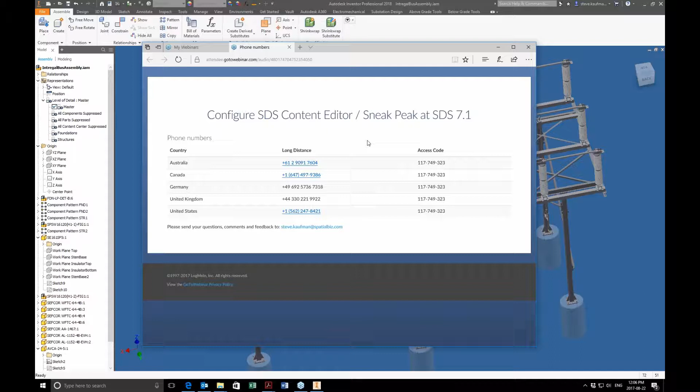So what we're first going to look at is some of the new items in 7.1. There's quite a number of things, a number of bugs and fixes, but also some new tools, and we're going to go through that first. So we're going to do the sneak peek at 7.1 first.

So let's minimize this, and we'll come into the sneak peek. What I want to show you first of all is just a couple exciting tools. I think they're exciting, mainly because I kind of pushed for them, but I like these tools, and we're going to look at this guy here. This is 7.1 I'm running, in 2018. The 7.1 will be available in 2015, 16, and 17 as well, so it's all going to work on different versions of Inventor.

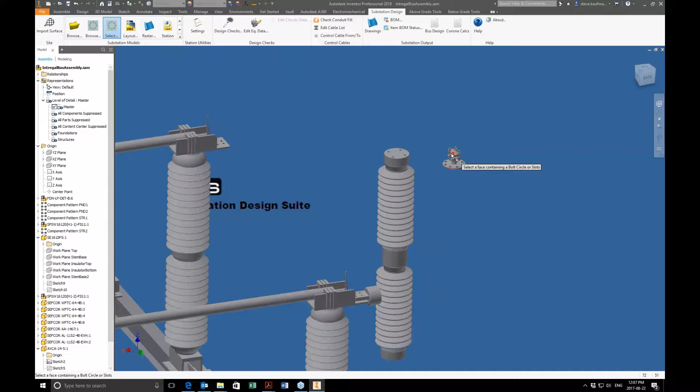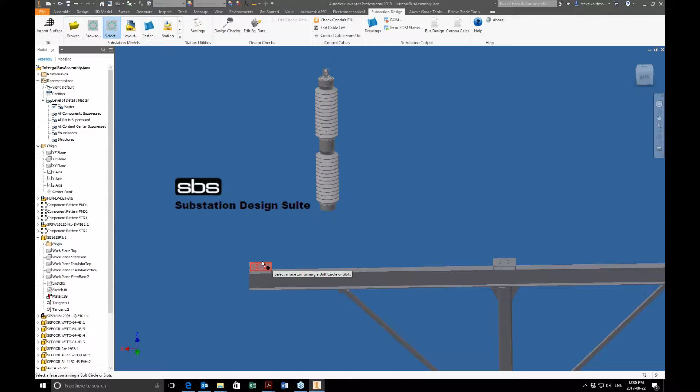In this tool here, I have a new tool called Select and Assemble Model Containing Bolt Circle Features. So if I highlight this button and highlight my piece, and highlight my piece I want to go to, it mates that for me. And now it has a mate on here. So what I'm doing is mating that bus component to the insulator. Now I don't have to just stop there, I can also connect from my insulator to my work piece here. And now I have them all attached.

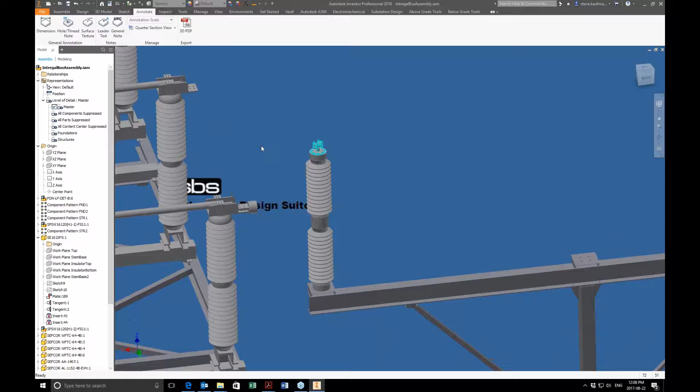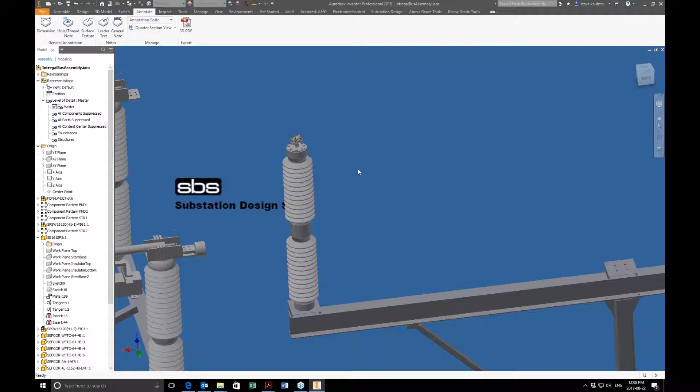Now if the holes don't line up, it will only show one attachment point. So we're still working out on this, and I was surprised by what we just saw there. So it is attached here solidly, and we're working on that as well. I'm going through a lot of the bugs and fixes and looking at the new tools as well, and feeding back. So I really think the 7.1 will be released in September, early September, and we're really working hard to get it out. But I really like some of these tools, especially this tool of bringing a part in.

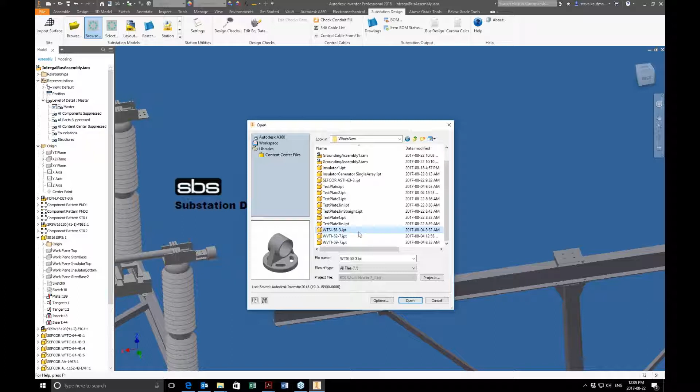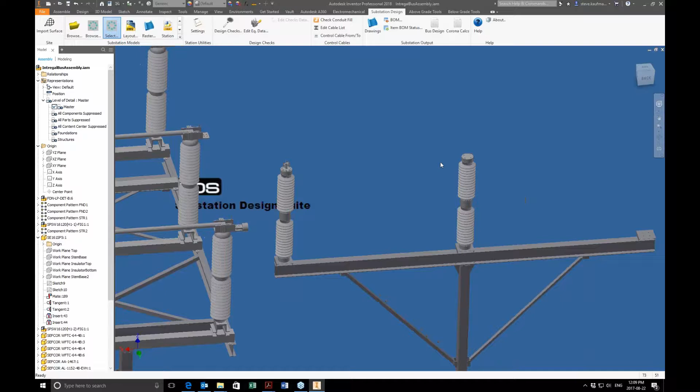The other part of the tool also brings in, I can browse to a fitting. If I come into a fitting here... where is that fitting? Oh, I know, I'll do this. Let's copy this guy. Copy, paste, and then I can go grab him as well. So we can browse to a fitting and also mate to a fitting. So that's one new tool that we've added.

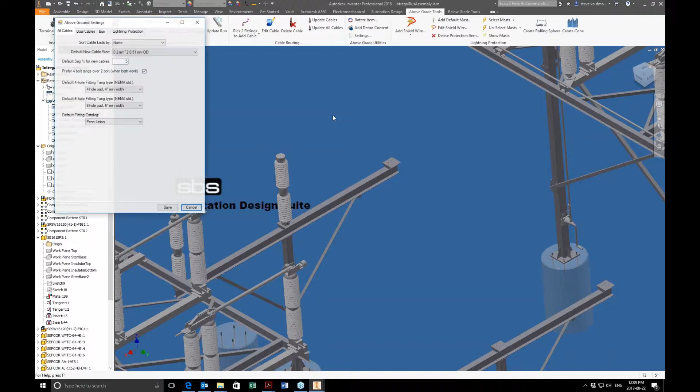Another tool that we've added that has been asked for is the integral web bus tools. So I'm going to place one of these now. I'm going to come to my above grade tools, come up to my settings. One thing new in the settings as well is that when I come into the bus, we have the integral web bus. So we have a library of those, and of course that can be customized, and we'll talk about that customization later today. But in the meantime, I'm going to place this 4x4 bus.

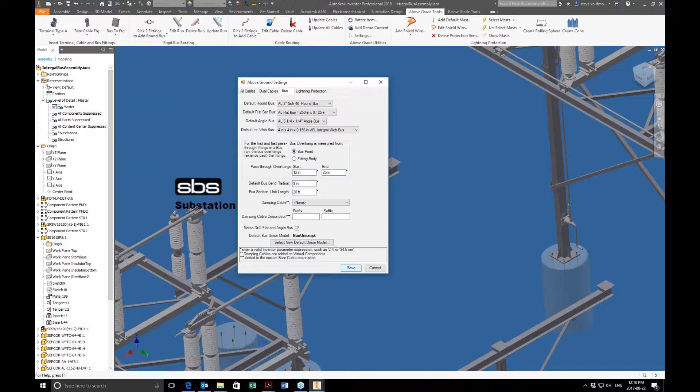As you can see, pass-through overhangs, start and end have been added in here too, so I can actually add in a number here for each of these, and it can be different numbers. I'm going to save that. Now I'm going to place in that integral web, and you can see we have a new item on the bottom of our pull-down menu. I can pick my two surfaces, and with that, that web is added.

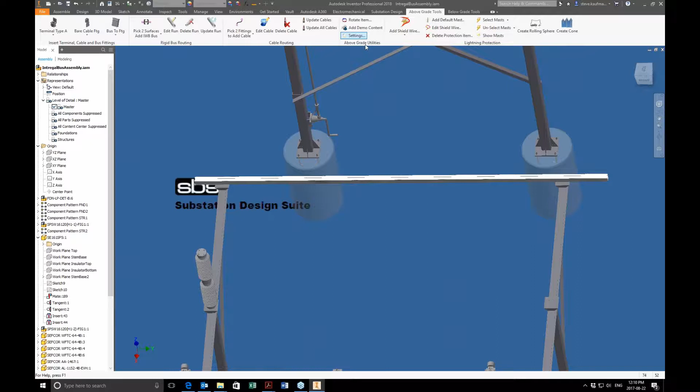So what it is, you can see with my settings as being longer on one side than the other and a 12-inch overhang. But also it has this new bus web design. It's a little bit beefier and stronger, and it can do longer spans than a round bus. So we can put that bus in there.

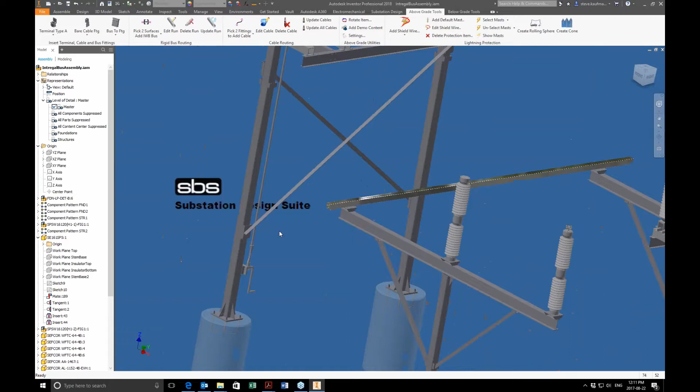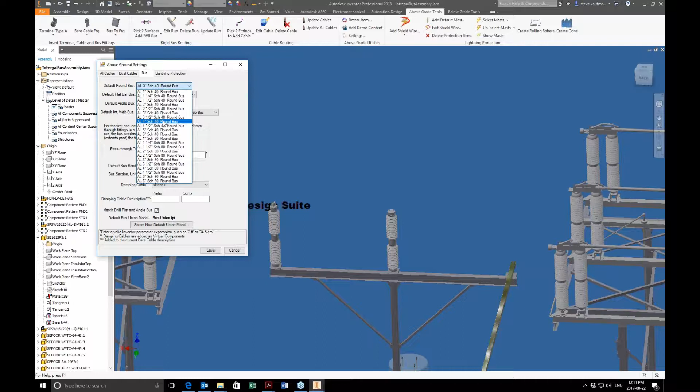Also, we can do that same tool, of course, if we are setting it up. Let's say we come back up to our settings, and we always want to see a negative number. So let's put a negative 5 inches in here, and we'll save it. I'm going to check my settings again. Bus. Let's go 3.5-inch bus. Save.

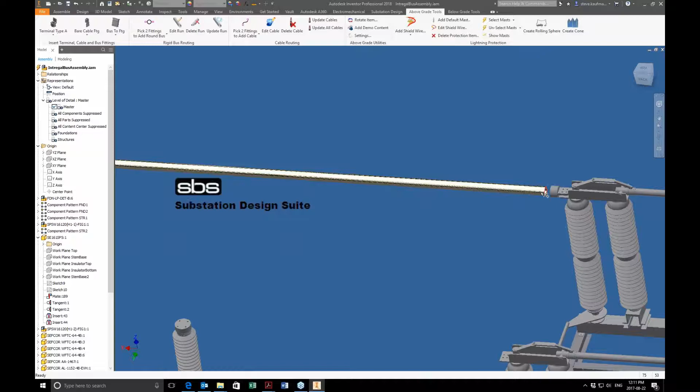So the next step, I want to go back into the placing of the bolted assemblies. Let's see what else the bolted assemblies will do. So we have our pieces here, and I have a group of pieces, and what we can do is add different bolted assemblies.

So I'm going to grab this guy here, and place him. We have this tool, we can place this, and I'm going to pick this guy here. You can see how it's added on. Now let's look at what the constraints are.

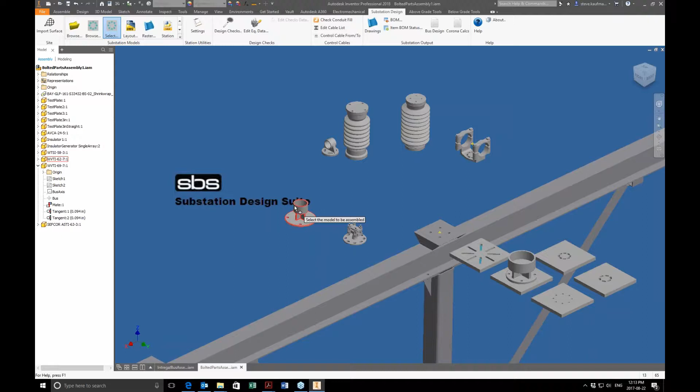The constraints is a mate face-to-face, and it's a tangent constraint. We can also place, I believe this guy works well with this one, on the slotted type of arrays here. So we can place different types of things on different items. If we place the wrong one, and I showed that a little bit earlier, if I place this one on this one, which is too small, it's not going to place it correctly. So we're working out whether we want to use a warning window to say, hey, that's the wrong size.

Usually it's pretty obvious that it doesn't fit, but when it does fit, it fits quite fine. So this is a 3-inch bolt circle. This is a different bolt circle. So we can go on like that.

So that is the type of fittings we can add. If I were to add this guy, let's copy that guy and paste him over here. Now I can place this guy to this surface here, and it's the wrong size. If I place this guy to the surface, it is the right size. So this size is fitting that size. This one is obviously not fitting.

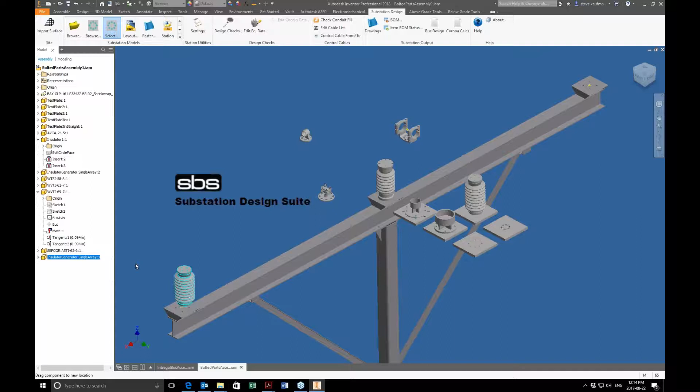So I think what we need is a window to pop up, but if you guys give me feedback, if this is obvious enough, that it is obvious that that doesn't fit, we can go from there. So those are the two key points that I really like in the new 7.1.

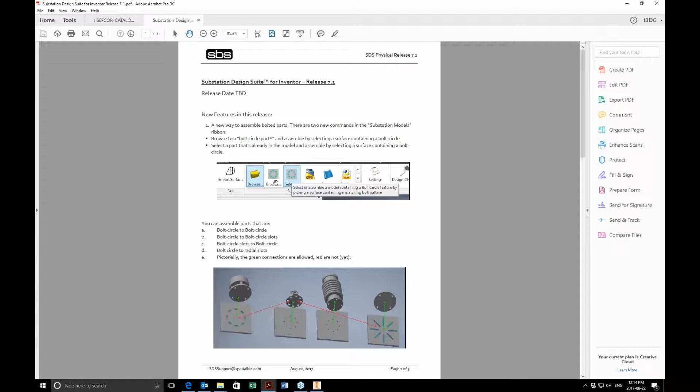There's a number of things that we're doing, but let's continue with these fittings. In the attachment, this is the attachment I have placed in the handouts in the GoToMeeting here. So here we are, we're talking about the handout in the GoToMeeting, and I'm going to look at what we're doing down here. This is where we're at with placing these fittings, insulators and fittings. We're able to put on a slotted fitting, we're able to put on hole fittings or long slot radial fittings. We're able to put this together.

We are able to put slot to a circle. We haven't yet got slot to a slot yet. We're still working on that issue, but for the most part, this is the most common one, is a group of holes like this. This is what I see. I don't see too many radials. I see a lot of slots to holes. I don't see too many slots to slots. So this is what we're looking at here.

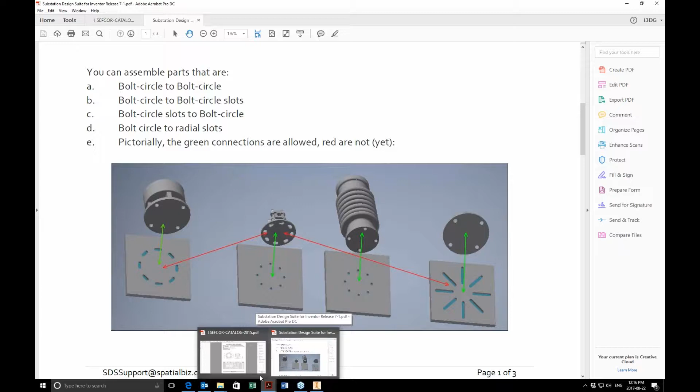One thing with the slots is that all the slots need to be a radial fitting right now. I've spoken with Sefcor, and the slots that they show in their parts, these are radial slots. So let's look at what I'm talking about when I'm talking about a radial slot.

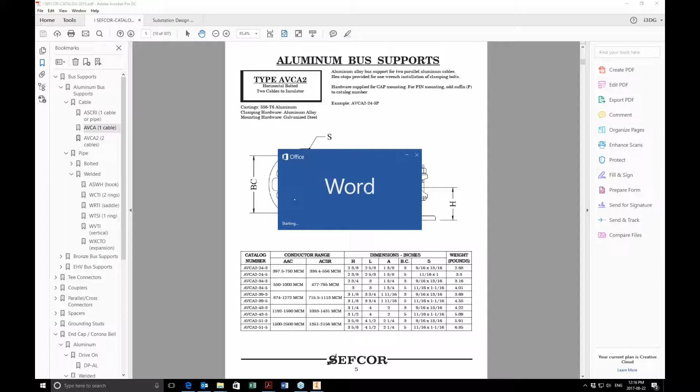So we come in here. This is still being updated. This is what I'm talking about, a radial slot here. So what we need to do is have our slots as a radial slot. That's what the actual slot is in the Sefcor fitting. That's the actual slot I'm seeing when it's on any purchase part that we're putting slots in.

I need feedback from you guys if your company is putting slots in, and if they're all straight slots or arc slots — I guess I should call it arc slot, that would be the proper name. If we're going to call it arc slots, or if you're just putting a straight slot in there.

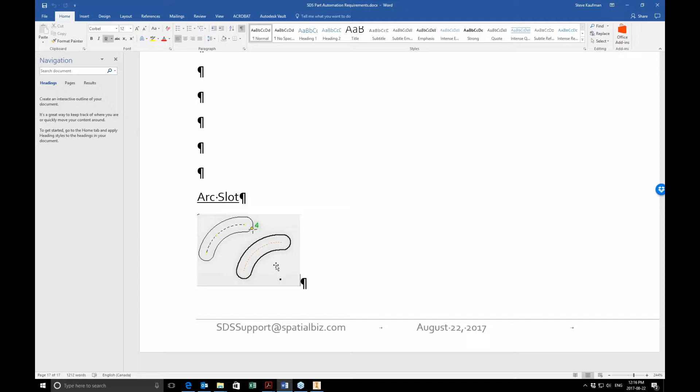The other thing we're looking at for this, and this is still being a little bit worked out, is that you need a work plane called bolt circle face. If you have that plane and you have a bolt circle on that plane, the software is going to look for that plane and the bolt circle on that plane first, and that's what it's going to attach to. If it doesn't have that plane, it will look on the XY plane.

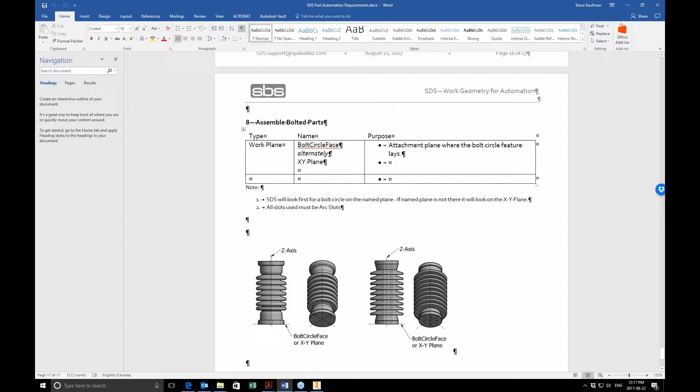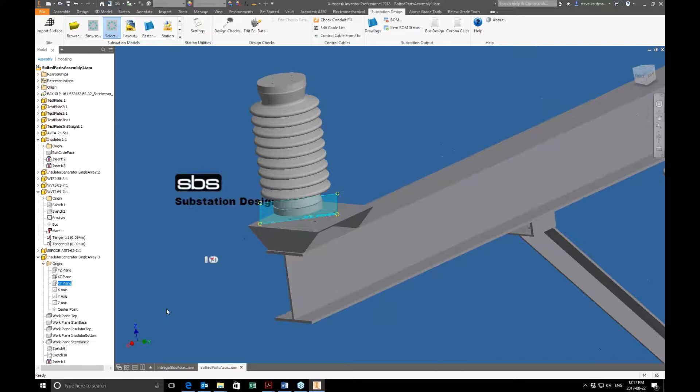So if we come back to some of these parts here, let's look at this guy here. You can see down here, I don't have a bolt circle face in here, but it does mount fine to its right size because my planes — because I'm following the substation design model strategy, I'm following that and placing my XY plane on the bottom. That's what good practice is. But if you don't do that, you can still place it up here and have a bolt circle face. So I'm not sure on this one.

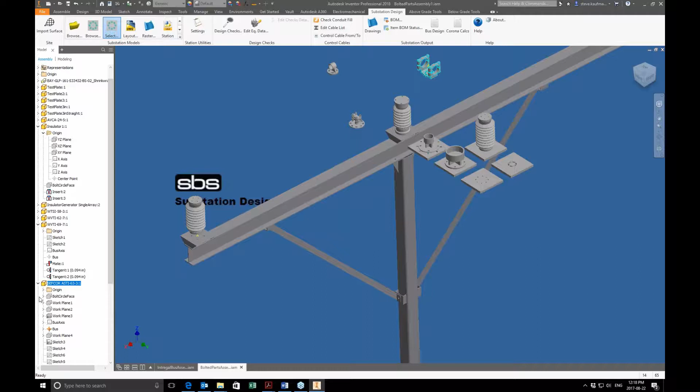He's got the XY plane and the bolt circle face in there, and that's fine. But for a fitting like this one, if we look at that arrangement, the bolt circle face, but the XY plane is a little bit high because of the, oh, that's a different one. I was going to say that on this one here, the XY plane was through the bus center, but in this case it isn't. So it doesn't matter if your bolt circle face work plane is on the XY plane, it will fit in. So that's what we're doing here.

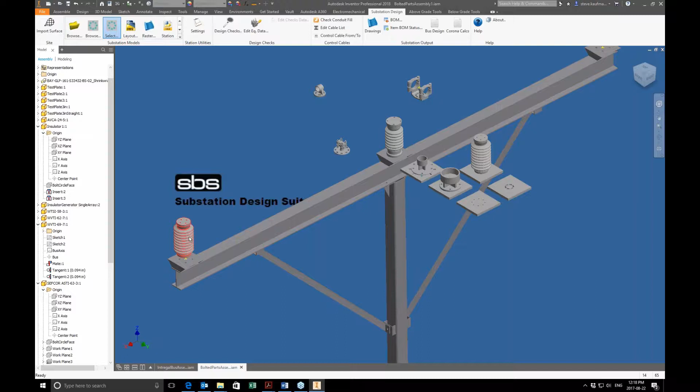So if I come in here, the typical object would be copy, paste, and then we can take this and attach them. What the other tool does is allow you to browse to find that fitting and bring it in, just like we do with the other fittings. So that's what we're working on with the 7.1 update. Again, at the end, I'll take some questions.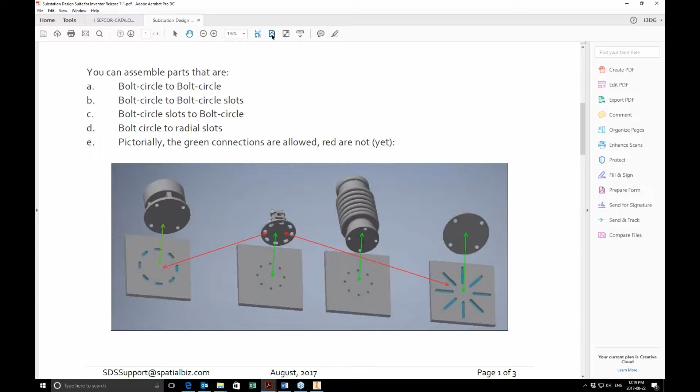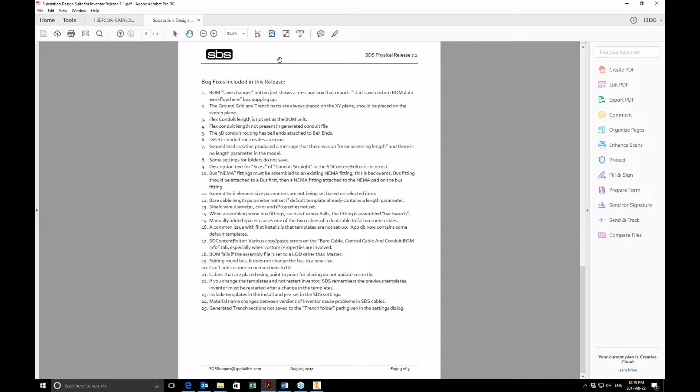The other items in the 7.1 update: we talked about the integral bus. We have this working as well. We have a number of bugs and fixes. I need to spend a little bit more time in testing, but some things like the ground grid trench parts are always placed on the XY plane. It would be nice to be able to put your grounding and trench on a plane that you pick. So we're working that out. It has been working, and I had some trouble with it this morning, so I didn't want to show it. So we'll get these bugs fixed.

Flex conduit length is not set as a BOM unit. So we're going through this. Again, this is attached to the webinar, and it's available for you guys to download. So we're doing quite a number of things. There's some things in here like shield wire diameter, color, and iProperties weren't set. It is now set.

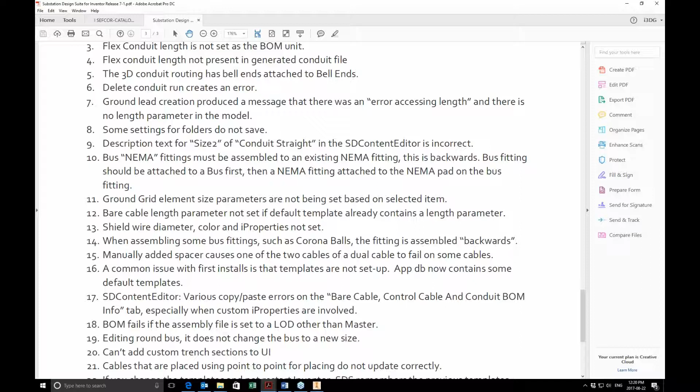That's a good one. Templates: we're setting it up so when you install, you have default templates. When I talk about default templates, they are the templates with home in the right position and the Z vertical already set, so you don't have to do your own custom items. You can always add to those templates, to whatever you want. They will be found in your normal template locations. Editing the round bus changes.

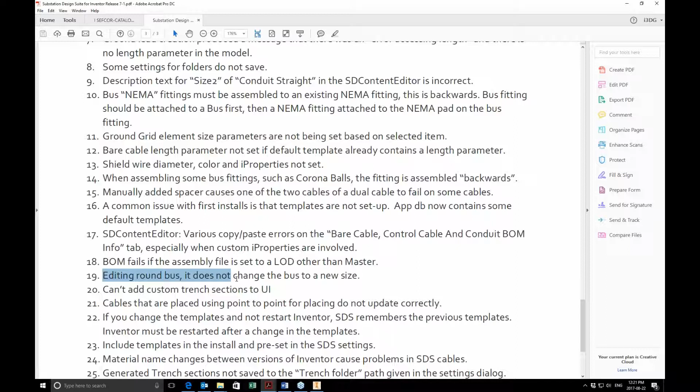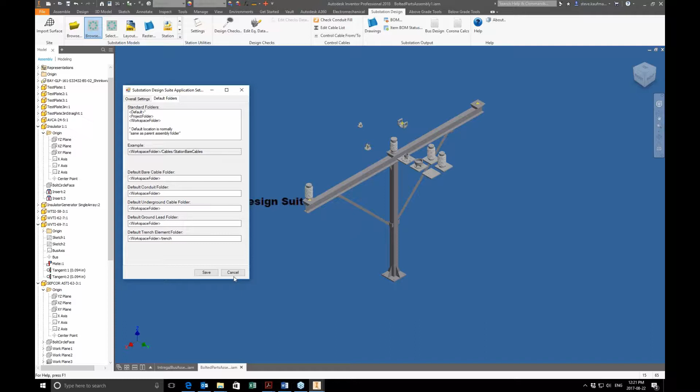So there's a number of things. We've gone through the trench folder paths and the other folder paths so that this tool is working much better now. I'm liking what I'm seeing, and we're quite happy with that. So go ahead and read through here, and you can give me some comments next week, or something specific. But this is what we're working on now.

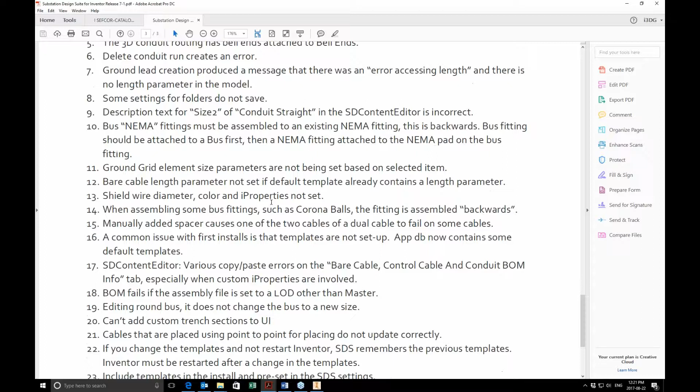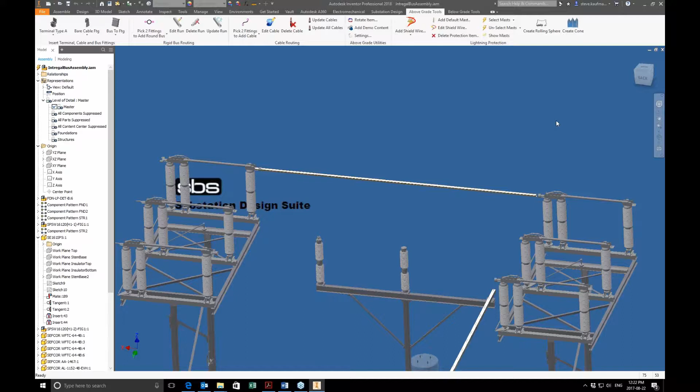So with that, I'm going to talk a little bit about the menus. I'm going to close this, and we're going to go into looking at menus. A number of people I've worked with aren't always seeing all the tools available here. In my training, I train people on a number of tools, but other people aren't taking the training and they don't know it's available. So I'm always surprised when I do some support, and I've worked with someone recently who didn't realize some of the things we can do.

My last webinar, we spoke about the cable fittings, putting these cable fittings in here and configuring the SDS menu. So that's what we talked about last time, and I'm going to bring up my Inventor again and bring up my standard assembly that is built.

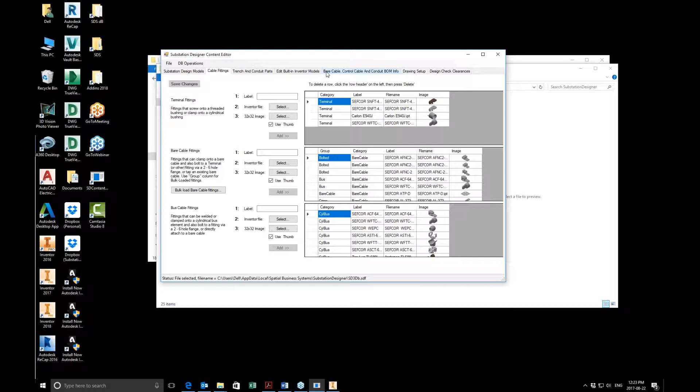So here's my, so when you come into here, this is what we talked about in the last meeting, how to place these in, a good way to do it, and that was posted on YouTube. So today I'm going to talk a little bit more in the BOM area. This is the bare cable, control cable, and conduit BOM info. And what we want to do is look at the information in here.

And at least twice in the last 2 weeks, people didn't know that you can add iProperties in here. There's a lot of tools and little bits of information in here, but we can add custom iProperties. So I can add tab 1, or let's call it column A. I'm going to add column B too.

And done. So I just added 2 custom iProperties to this database, but I don't see them. So what we need to do is come up here, access another page, and you can see column A and column B have been added.

When a bare cable is made, or any of the items in here, because that column A is across the entire group, all A and B, you can add your iProperties to that. And these are custom iProperties, so they will show up in the part as a custom iProperty. So you can add all that information in here. So we have column A and column B inside there.

So what we want to do too is, well, how do we get all our data in here? One thing that I talk about in my training, and I'm just going to bring it up here because I'm so surprised by some people not trying different things. I'll come up here and open up my Excel page here.

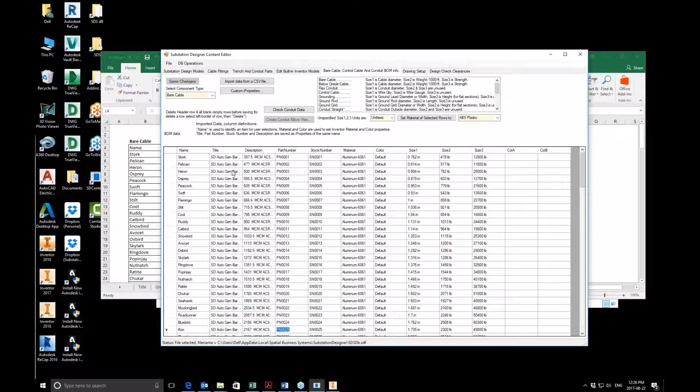So if we're in this world here, and I want to get some information into here, let's say I want to add a bunch of information here. So I can come in here, copy right from here, come into here, and paste it in. And I can save those changes. So I'm able to copy it in. But I want the data out.

If I want the data out, I can take this, copy, and I'm hitting Control-C and Control-V to copy and paste. And I can put that information in here. So that's how we can get the information back and forth. Once in here, you have all the tools that Excel has to put information in here. So you can see where I don't have column A and column B set here.

So let's go back up here, and you can see I got test items in column A and column B. So I can come in here and grab those iProperties and copy them out, and in here I can put those iProperties in. So now I have those iProperties in. Now I grabbed more than what I needed, but they're in here. So we have column A and column B in there.

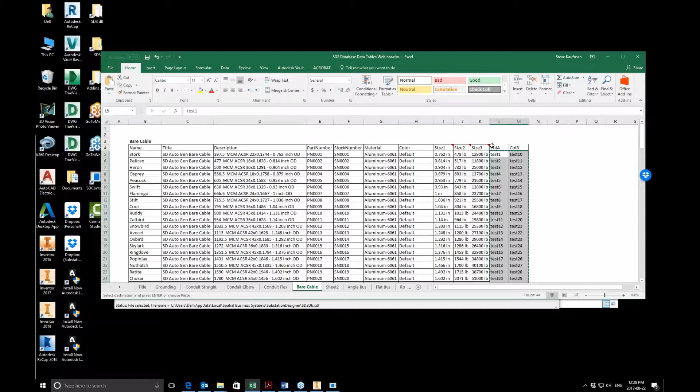So let's copy and paste that back in. I can see that I have it down to Popinjay. So what did I have down here? Mockingbird. So let's not take that whole column. Let's take it down to Popinjay. So let's take the column from here

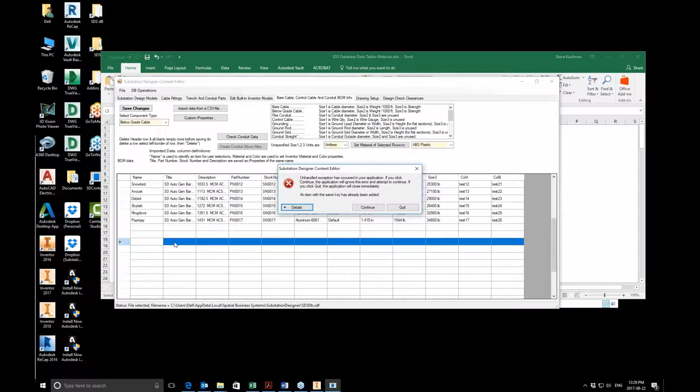and paste it in. So this is going to look a lot nicer now. Now I'm skipping the first one because I had the test cable in there. And there we go. Now we're even and ready to go. If you need to delete a row, you hit delete on your keypad, and you can delete a row. This is being worked on, and in the new version it will be updated again.

So we went down to Popinjay. My copy and paste should still be in there. And away we go. So we have our items in here. So you can cut and paste and bring them from one point to the other point.

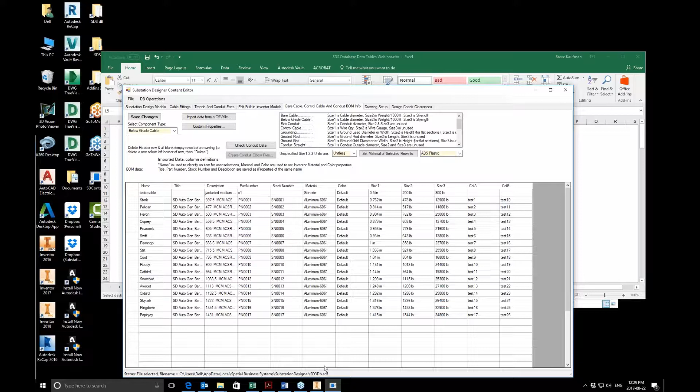The other item in here is that when we're in Inventor and we have our iProperties in Inventor, if I want another number to be the same as another number, I can go equals, let's say part number. This is normal Inventor practice, and some people don't know it or not, but I can put a function in here, and that function is with the greater than and less than brackets and whatever item I want.

So if I wanted to, in here, instead of test1, I can say this equals, and I can only do iProperties, so we've got to look at what iProperties are here. So the iProperties in here are title, description, part number, stock number. These are the 4 standard iProperties that Inventor uses. So I can have this as, this equals part number.

So when I bring it in as a custom iProperty, it's going to equal part number, but it can also put in column B. So what happens then is I can combine iProperties in here, I can combine a part number and a description if I wanted to. Instead of column B, I could say that is a description or whatever I want. I can use that tool.

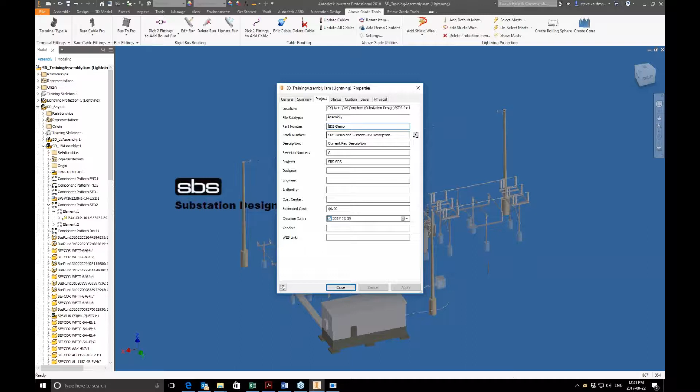So this information gets placed into Inventor, and it would come up in here. So if I come in here and go, this one equals this, and if I put another bracket in here, description, I have part number and description combined, and that's what this would do too. This would combine these two with a comma in between. If I put text in between, I can put a colon in between, whatever I need to do to get my pieces together.

So that's really all I wanted to talk about today. I am open for questions. I'll be online till 1 o'clock, and we can talk further about whether it's in the 7.1 update or in the content editor, able to bring things in here too.

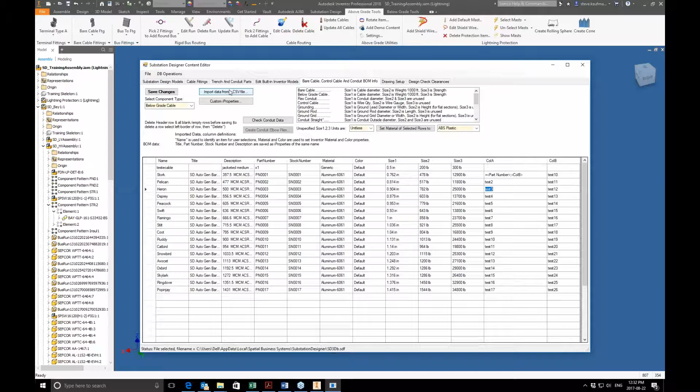I also want to mention that this information can be copied out as well. So if I copy this out, and I come into my fittings, let's say sheet 2, I'm going to bring this into here. I can bring my fitting information in here. Now, I can't go the other way because this includes having to select and embed that file in the database, but at least I can copy the information out and know what fittings I have in here and what group I have in here.

So I can always add titles up here, group, category, and such as that. I can add those titles in here, and I can save it as an Excel template and use it and update it. So for the guys who are using a number of databases for different companies or for whatever project they're on, they can use this type of thing and make it into a PDF and have a real document that people can use and reference.

So with that, I'd like to leave it for questions. If you guys want to bring up some questions, I'll look at them and we can go over them. So what happened to my questions? So I got a couple questions here, and I'm having trouble seeing them suddenly.

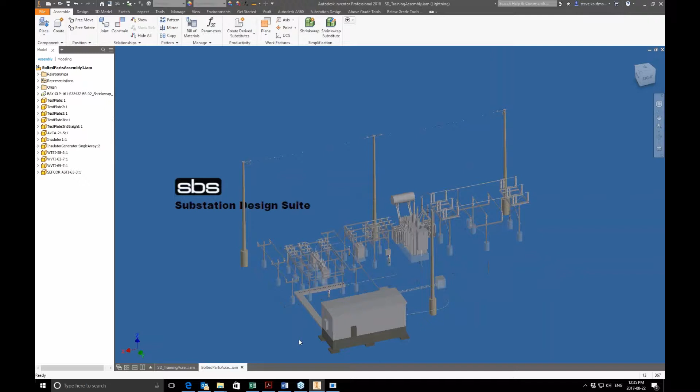It is looking at that bolt circle. It's looking for a location of that bolt circle on here. So it's looking for the center of the holes, the center of the radius of that arc, and it's working it out. So it is working. If you only put your insulator on 2 holes, it will also attach to a 2-hole thing as long as it's seeing the spacing between the holes at the right size.

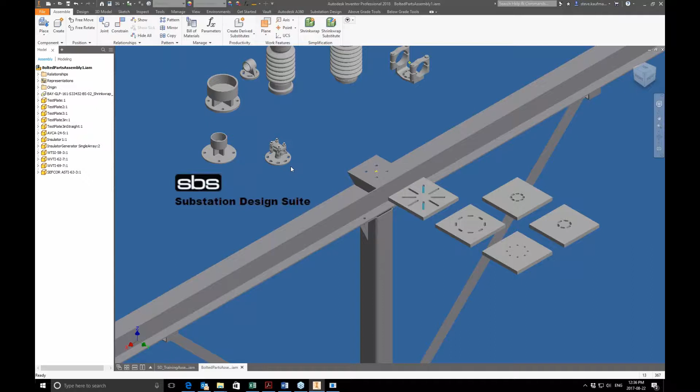Got another question here. With the new feature mating the bolt circle, are you going to be able to rotate the fitting around the bolt circle similar to rotating a fitting on a 4-hole pad? That's a good question, and I'm trying to work that out. I was talking with the programmer, Dan, about that type of thing, and it would be nice to have, definitely. So if I place this guy in here, let's see what happens.

So that's attached. If I come to rotate fitting, it is rotating it. It's hard to see. So if I come up here, let's show a work plane. Visibility. So let's rotate that fitting. And you can see it's rotating. So that's a great question because I had an answer.

Okay, see what other questions I have. With the new feature mating, okay, are there any other questions? I only have the one question showing here.

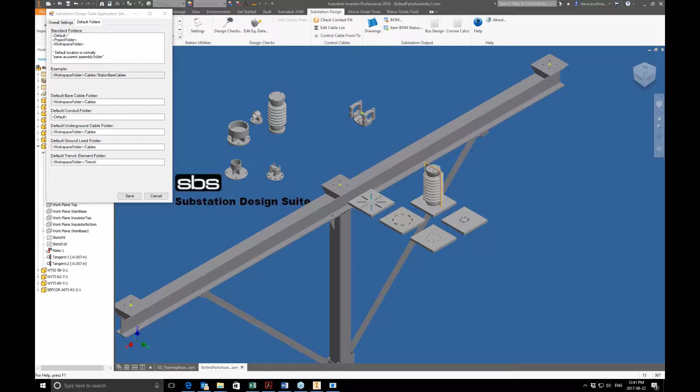Insulators typically have two bolt hole planes, top and bottom. How does SDS determine which is appropriate? What if you're installing an underhung insulator? Is there a way to flip and not rotate the insulator? Well, we're hitting the face, so let's look at what happens there. That's a good question there too. So let's grab this guy again.

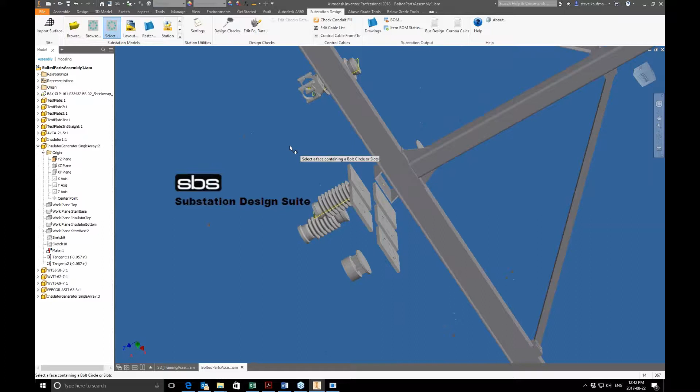I'm going to copy him and paste. So I'm going to grab this guy, and we're going to place this one on. Select a face. So I'm going to hit the underneath. I'm going to hit this face, and there it is. So I'm able to place it underneath as well. Then the question is, well, what about the other end?

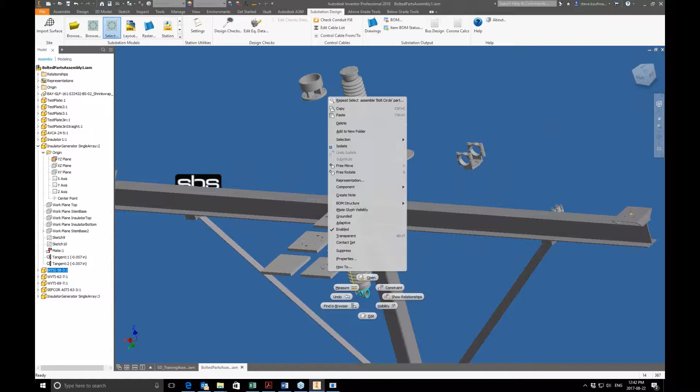Well, I can still come in here and grab this guy and say I want that to this face, right? Or I want, where's copy, paste, or I want to add that to this face. So we're able to do it because we're picking faces on it, and it's able to do it in that manner.

In the SDS content editor, you can sort the fittings, controlling the order they appear in Inventor. Say if you want to have the fittings sort by part number, so they show in a numerical order, and have to add additional ones later on. So let's come over to the fittings in the content editor. And I believe you're asking if you can sort this. No, it's not sorting this. It is in the format that you place it in.

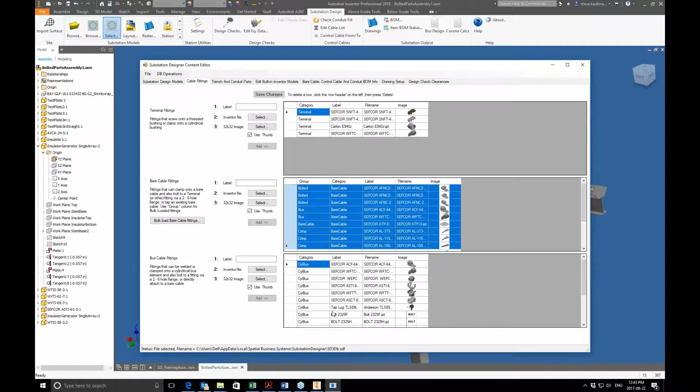So you'll have to plan ahead in your organization of this. I have found that myself, but again, you can copy that information out, put it into Excel. What the heck is that? You can put it into Excel, sort it in here, and then you can follow it and manually place your fittings in after you sort it out. So if you do some sort of planning like that, that's what you need to do right now. But I might add that to a list, sort fittings.

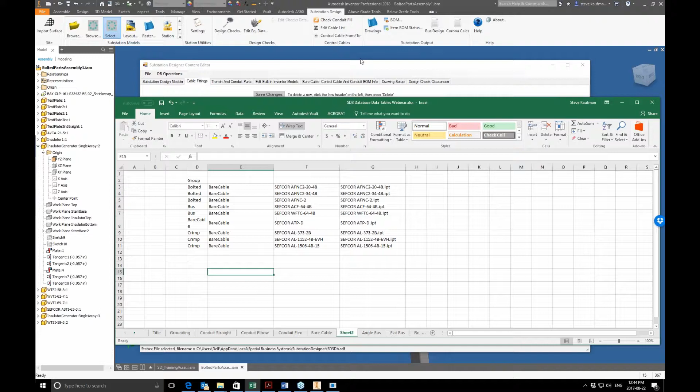The cable, remember when we were placing cable, we can sort how the cable is found in the above grade tool settings. So I want to remind everybody that we can sort the cable list as well.

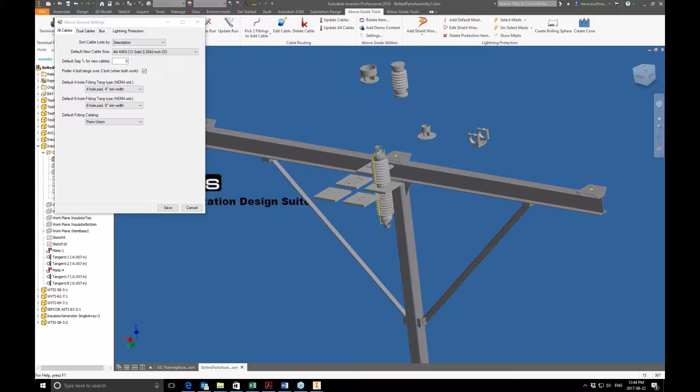How does it know which hole geometry to constrain to? It seems like it could be some angle off. I think we had that question already, but it could be the way this tool works. It's just looking at the arrangement of the holes. So it's going to put it on. I'm not sure if it needs to see what hole it is.

Can you add the sort to the wish list? Well, that's Josh. Yeah, I'm going to put that on my notes. Sort fitting list. But if you do plan ahead, you don't need to sort.

Okay, it looks like the last question I have right now is, can the round fittings be rotated after being placed like the NEMA pad fittings? Yes, that's what I showed earlier. We can rotate those fittings. So I can take that and rotate that fitting.

All right. So I don't see any other questions. If anybody wants to ask more, oh, there's another question. Can the round fittings, no, where's that last question? I thought I saw a new question come in. Sorry if this is kind of confusing because I'm not sure with this tool how it's working.

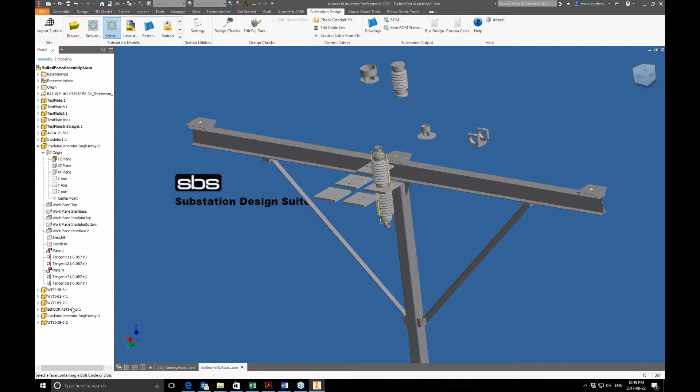Does the rigid bus adapt if structure and fittings were to relocate in the yard? Yes. When we do an update, so if we were coming in here and going to update the location of that bus, it should be updating when we do the update run tool, right? So that's normal function for it. So it should be operating that way, Justin. Are you not seeing that? Oh, just new to the software. Okay, yeah, it's supposed to.

So when you want to update a run, whether it's a bus or cable, there's update run for the bus, and there's an update cable as well, and there's update all cables. So the whole idea behind the updates is if there's elevation changes or spacing changes, you don't want to rerun that. And the idea is that it will change the existing part and not create a new part. What about adding a, wow, I've got a whole bunch now. Good.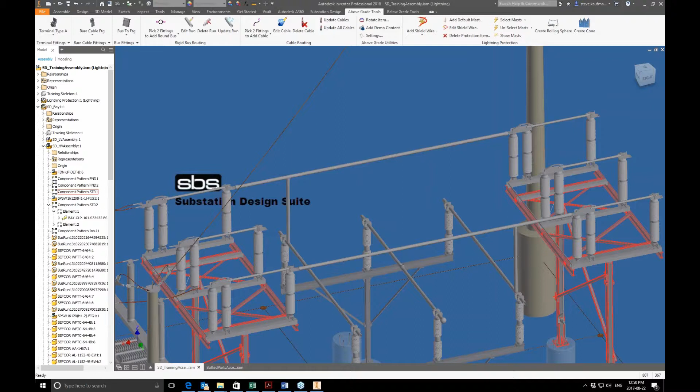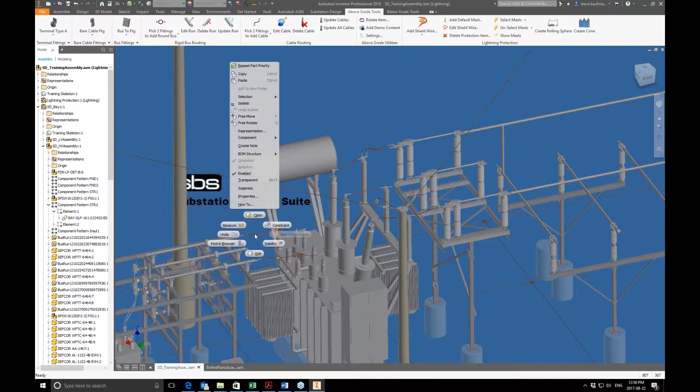Okay, file names. What about adding a prefix for the cable file names? Well, the cables, when they come in now, they're just named cable. So I'm not sure what you're asking there. If you want a prefix to a file name. So let's say you got a contract and you want that cable name named differently. I see. Okay, I can picture that now. So if I got this guy here open, right, and it's just called bare cable, I'm going to have thousands of things called bare cable.

But this number here is basically a date code, a timestamp. So you could identify it by timestamp, but I can understand the want for a prefix. Myself, I can understand that perfectly. So I'll add that to the list. Prefix. I'm not saying these will be done, especially for the next update, but they're good comments.

I had some software some years ago that you would put a general contract number and it would always add that contract number to every part.

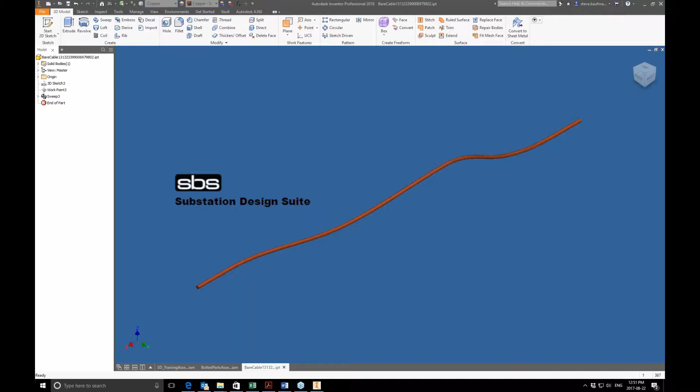Okay, Stephen. Could a tool be set up to use 3D sketch with the grounding, and not just use 2D sketch plane? We do have that ability for 3D sketch planes. Let's open this up.

Maybe we can cheat by playing around with the conduit. If you look at this piece of conduit here, it's on a 3D sketch plane. That's one of the tools under below-grade tools, called add 3D conduit. This tool lets you create a 3D plane.

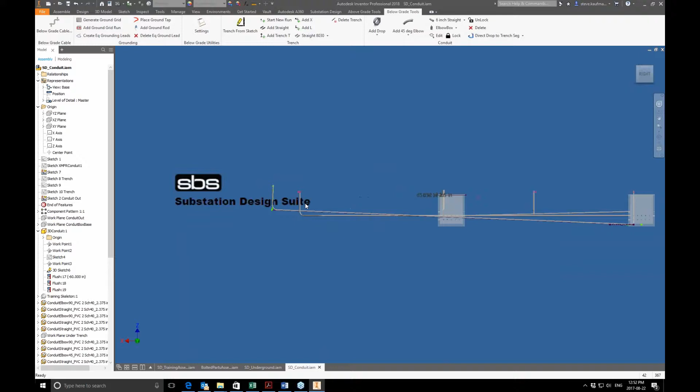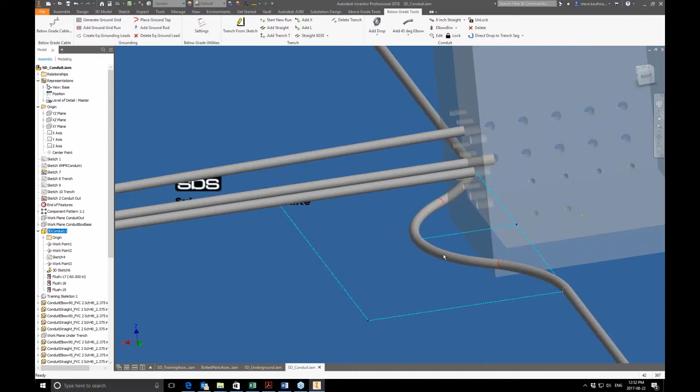This is part of what I show for demo purposes - this piece of conduit here. Let's grab that. It's on a 3D plane, and you can see how it's angled up. It's also bent around here, following that 3D sketch curve. I was playing with it just to show this is a tool that can be done.

What happens here is when you're coming out of the conduit, you want it to come out at a right angle, but it's actually angled. In real life, it would be a little bit angled coming out, and the guy would maybe bend the conduit a bit. So, could it be set up to use 3D sketch with grounding, not just the 2D sketch plane?

I will note that. I'm not sure if there's a real big push for it, but I'd like to know more about an example for that - if you want to email me an example of where you'd use 3D sketch. I can't see it working offhand with the grounding tool, but I would probably try to cheat and make a custom conduit to look like a grounding wire, though that's not the best way.

All right, I'm going to the next question. Say a job name, underline cable.

Yeah, well, I think we talked about that - if we wanted to add a prefix to the cable. I would like to do that. I think that's a decent one, but we wouldn't want to just do it with the cable - we'd want to do it with the bus, and with all the generated parts.

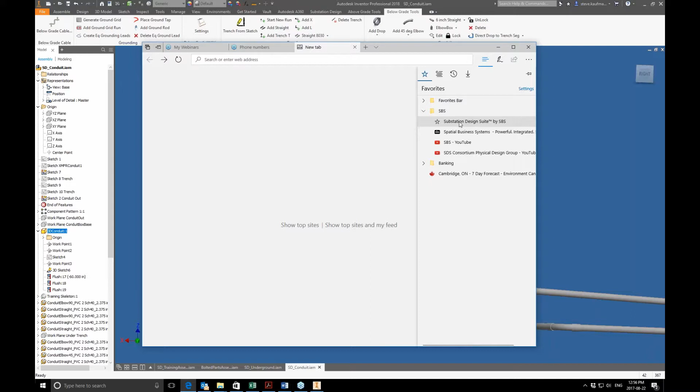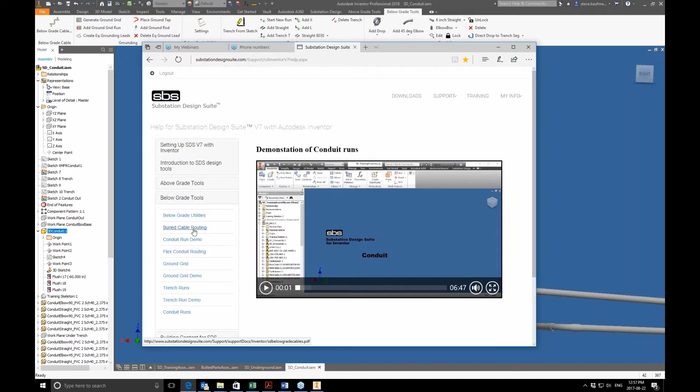I'm just going to remind people of the online help, because if there are beginners here - my intention for the webinars is to go a little bit beyond training, but if someone's new, it's worthwhile. If you come into the help files, SDS V7 help files, there are items in here - if you wanted to look at the conduit, there's a conduit demo here that you can watch, and that would help you, as well as there's instructions in here too.

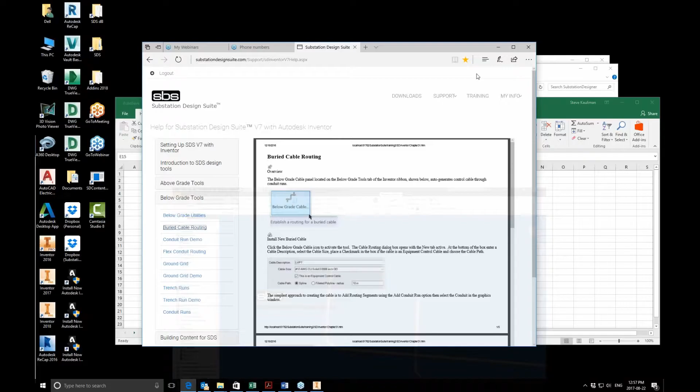Now, back to Stephen's question - the second question, if you could demonstrate adding a below-grade cable with a larger diameter. Well, below-grade cable is in the tool here, so let's come into the tool.

And we come in here and look at below-grade cable, right? So the size of the diameter is all set here, as far as the material selected here. You could tell it whatever material you want. If you look at the material selections, these are the default selections that SDS is looking at.

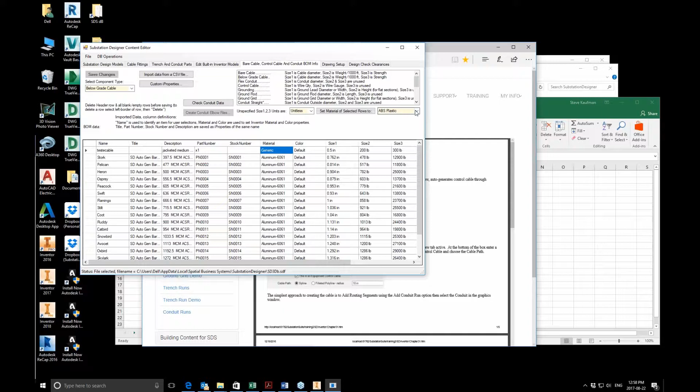This is from an Inventor out-of-the-box list of material availability. If you have custom material saved in the part, the root part that SDS uses, you should be able to select a different material, especially if it's in your template part as well as in your automated part that is built in here. You come up here and grab your cable spacer, make sure that material is in this cable spacer, and make sure that it's in the templates. You should be able to get material that is outside of this. So if you need a different diameter, add it to here and put it in here.

Then in Inventor, when you want to add that below-grade cable, you can look at cable, this tab here, and then you can grab whatever different below-grade cables you want. It doesn't show that big list that I have in there because I haven't saved and reopened Inventor yet.

I hope that answers your question, Steve.

As far as the other question about complex shapes for your cables, for the below-grade cables, I don't see that coming right now, but if there's more of a push for that, we need more people asking for that.

All right. I'm not seeing any other questions, but I like the questions.

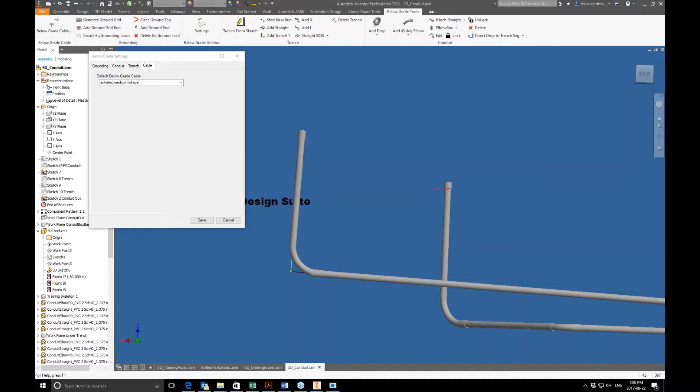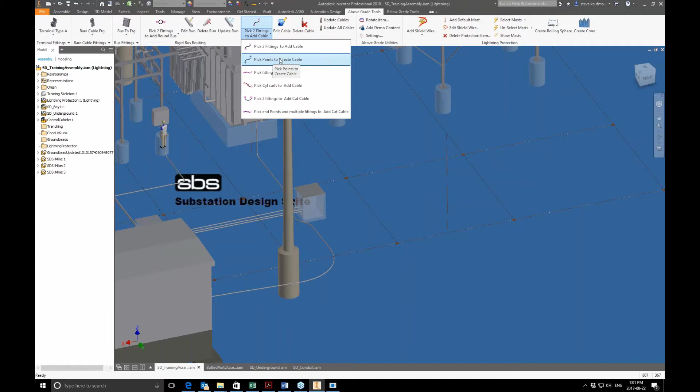Well, when we're picking our cables, we got to go through work points. When we're working with cables and we want a default location, if you take the training, we do talk a little bit about that. But typically what you would do is use pick points to create cable, or pick fittings to add cable.

So you could create a fitting to pass through. If you look at this item here, how this cable's run here. Let me make sure I'm on that. This cable here is run from this fitting through this fitting into here. So I'm fixing the path by using the tool pick fittings to add cable.

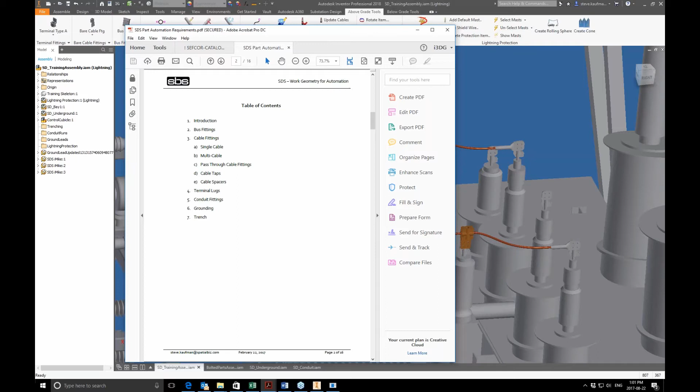So if I pick these three fittings that go through, now remember that we have the automation requirements document, which is downloadable from the help on the website, and you come through here and you'll understand what geometry you need to add.

But if you don't have a center point cable fitting like this, what I typically do is add a tool of work points, and you can see what this tool is here. This is just a phantom part, so it doesn't show up in the bill of material, and I add some work points to that for what I want the cable to pass through. And I will place that in my island assembly. If you take the training, we talk about island assemblies and being able to do stuff like that.

It seems like the cable used to save in the top level folder of the assembly that the cable was ran in rather than the destination path manually. Well, that's back to the folder issue that we talked about earlier. So in the settings for the folders, in substation design settings, and we come into the folders, we can identify what path we want that to be saved in.

So I misread your other question about paths, thinking it was the path of the cable and not path of the file. So this should be able to tell you. If you put it to default, it will save it in its parent assembly folder, and that's my favorite. Other people want it all into one cables folder as well.

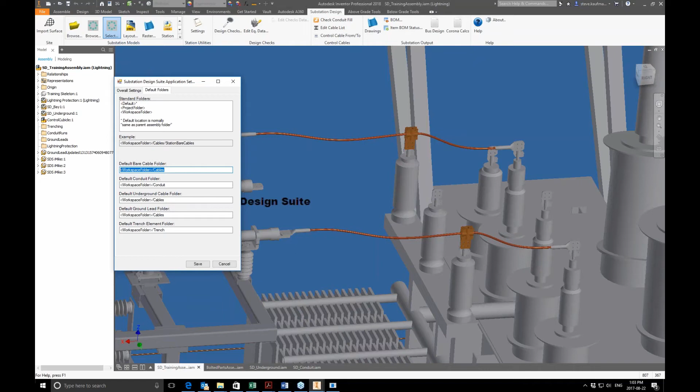I hope that got it for you, Justin. All right.